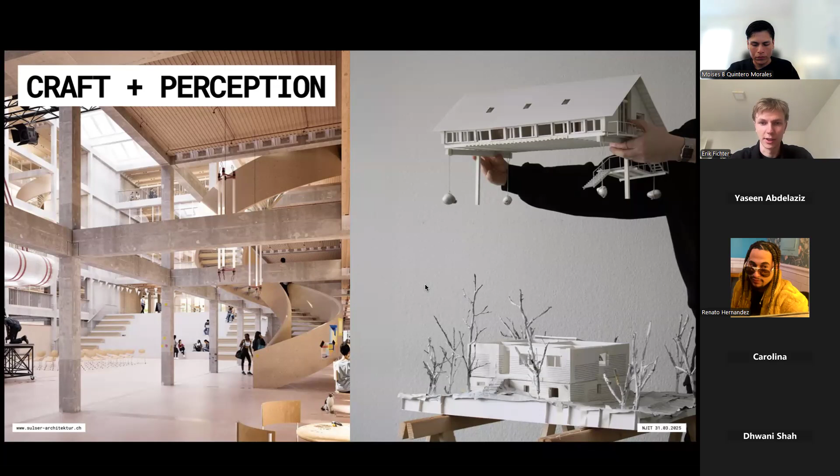And mainly to give you a bit of a background, our practice is in Switzerland. It's a relatively small country in the center of Europe, though not part of the EU. And I'm showing this to also give you a sense of geography and climate. I think our climate in Switzerland is relatively similar to the one in New Jersey. I think your winters and summers are slightly more extreme, but not too different.

Also, I was just researching just before: the population of New Jersey state and Switzerland is basically the same, more or less 9 million inhabitants each. So we're not all too different.

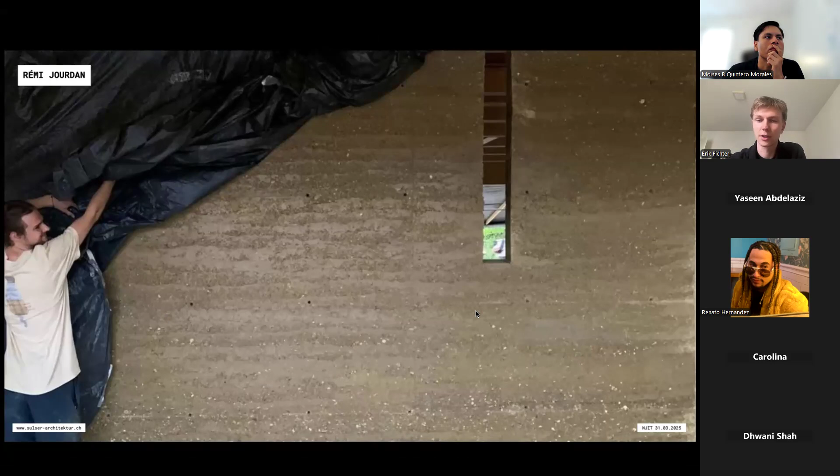I'm running this practice together with my partner, Rémi Jourdan. We met each other around 10 years ago during our studies at ETH in Zurich. And he's become an expert in earth construction. And he also gained a lot of experience on construction sites. So this photo shows an example of a rammed earth wall that we built together. And here another example of a rammed earth oven that we built. He's also very much interested in sharing knowledge and having construction sites where people can join and learn.

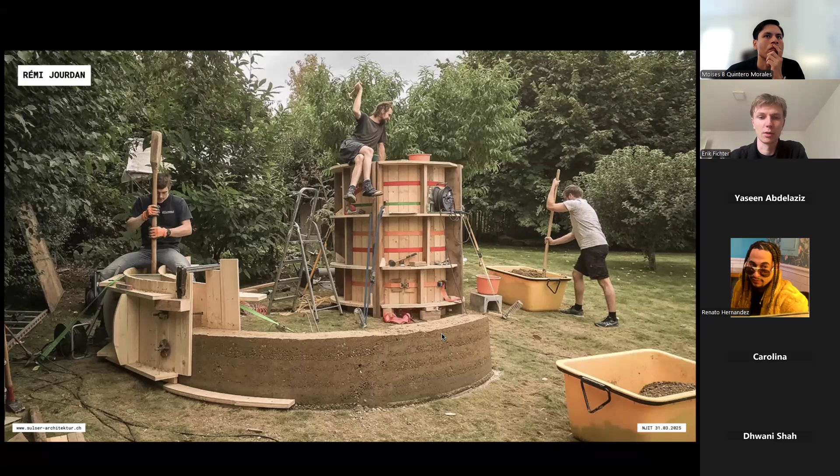And as Moises said already, after the ETH, I went to the GSD for my master's, and there I developed my interest in adapting existing structures and modifying buildings and also playing with the perception. And this model was part of my thesis, where I've introduced a new bracing system to the existing tower in Berlin, allowing to remove the existing cores to free up the plan and introduce new functions. So it's been a pragmatic approach, but at the same time, it drastically altered the urbanistic perception of how the building is read in relation to the ground.

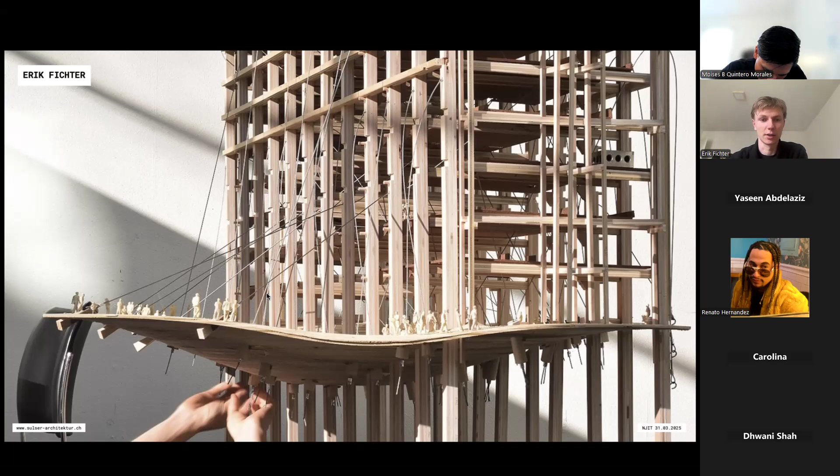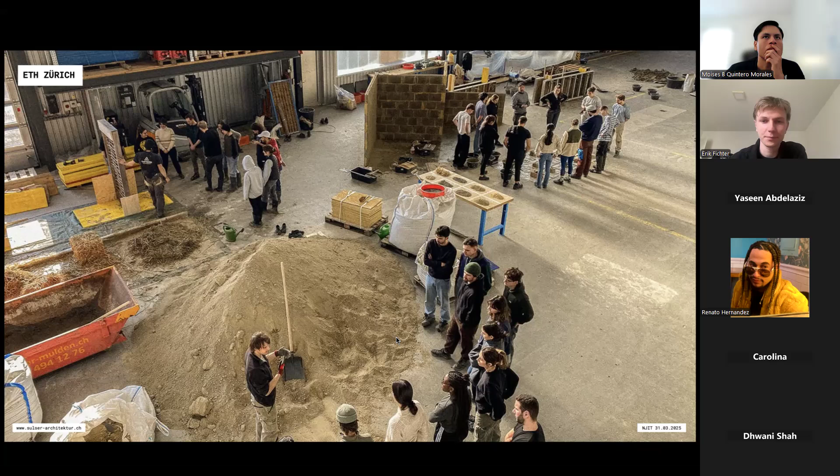And then also just to mention that we are both working part-time at ETH, Rémi mainly in research, and I'm mainly teaching, because we think it's always very fruitful to have an exchange with students and test new ideas. And this was part of an earth workshop that Rémi organized.

So one topic that we both think is very important is to move the building industry in a so-called right tech direction. And what we mean by that is we are criticizing the amount of technical systems and equipment that are built in buildings, especially over the past decades. It has really steadily increased a lot, and we don't think that it has improved the inside climate much, and also these systems are quickly outdated, so it's not very economical.

And we think there's a lot of knowledge if we go back in time, even into pre-industrial times, where the construction itself had a lot of knowledge that was then eventually taken over by technical equipment. And so there are two terms, one of which is thermal mass, and the other one, vapor open construction, that I want to talk about more in a second. But at the same time, we don't want to be only low tech and no high tech, but instead of putting the tech inside the buildings, we want to leverage it by using it in an efficient planning process and doing, for instance, thermal and vapor simulations.

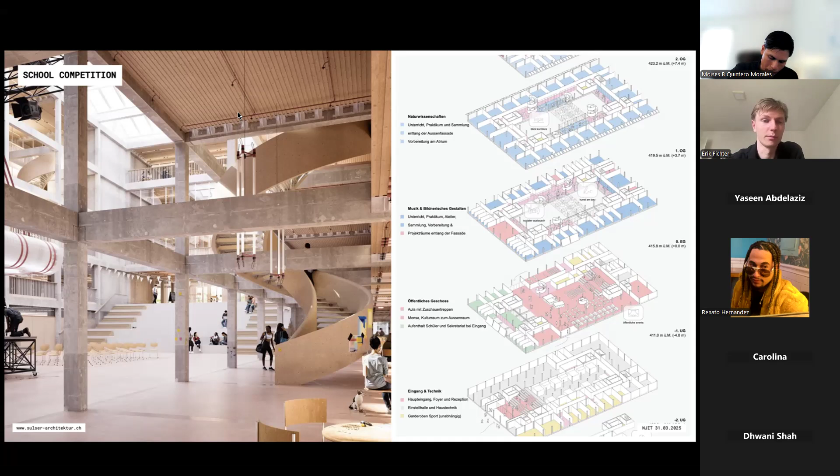Then on this slide, I just want to make the point that we are increasingly trying to use numbers and calculation to prove certain points. And in the submission, we made a calculation for one module to see how much embodied carbon is within the module, and then compare it against the conventional construction so that we make the point this module has less than a third of the embodied carbon than what a conventional construction would have.

And so I think this is also something we want to build out more, to use a data-driven approach to make a point and to convince potential clients. Okay, and so this would have already been the last slide for the presentation I made 2 weeks ago, which was at that point very much work in progress.

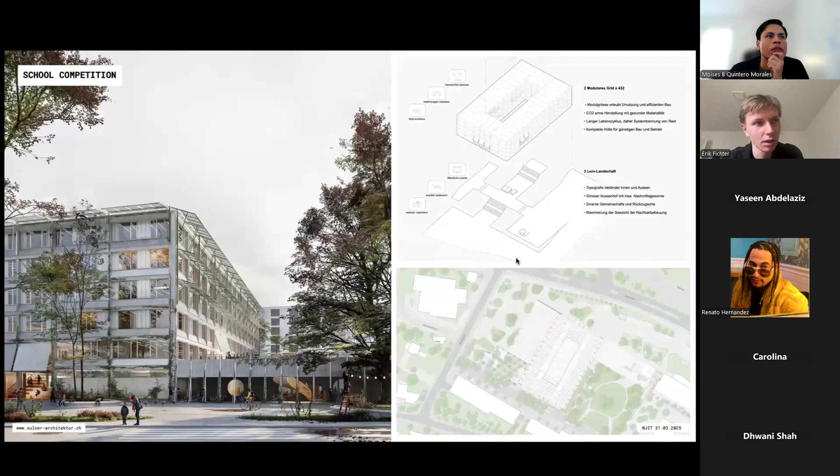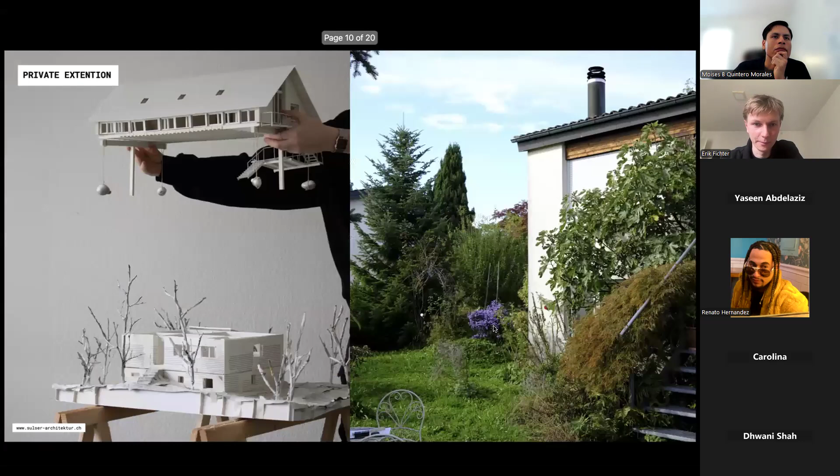Very cool. Thank you very much. Hi, my name is Yaseen Abdelaziz. I thought the presentation was great. I think you did a great job, especially with the model as well, whether it was the physical or what you have going on over here. If you could go back to the smaller scale model, I'd love to see it again. In this one, huh? Yeah. So I think it was the previous slide that you just, yeah, perfect.

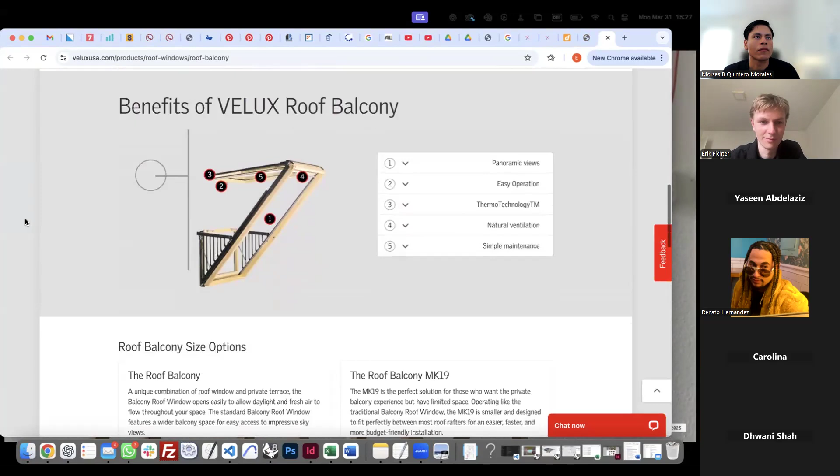So at the architectural firm that I currently work at, we had an issue where we had a similar roof and the client wanted to add some balcony space. So we used these windows. I added it to the chat. I think it would be a great idea to look at that. I know that you specifically amplified on these windows, but these kind of windows open up into balconies and it creates really interesting spaces. And I think for a big roof like that, highlighting moments where you'd be able to walk out and engage with Switzerland, because I know that you guys have great views over there instead of New Jersey.

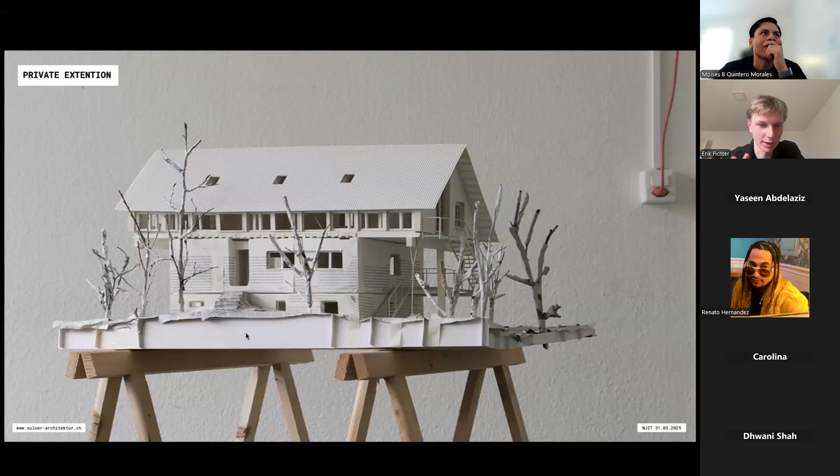It would be pretty interesting to see if you could kind of amplify that. Yeah, no, it's a great comment. Actually, so this is the north facade facing the street, so the, let's say, less interesting side. And then on this side, that's where we try to introduce this rather big opening where you can fully open the glazing. But it's a good point.

We have this regulation here in Switzerland that you can only do such a thing, I'm also not sure how to call it, but having this push out of the window being not larger than 1/3 of the width of the entire roof. So measuring from here to the very end, and then you can take 1/3 and do such a build-up. Okay, I see. Thank you.

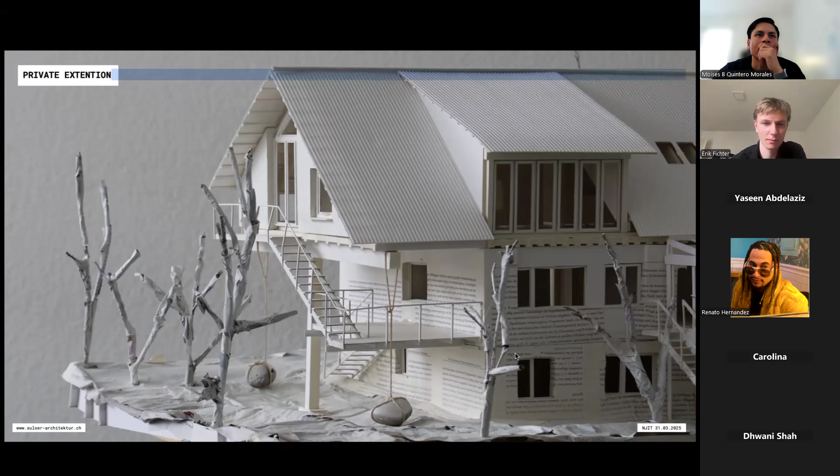What about Mariam, Dhwani? I was gonna ask, in one of the slides where you were presenting the fabricated model of that window side, you had this frame with a filled up frame, that one. Can you just touch up a little bit more on that? I don't think I really understood that. Like, what is that doing? Like insulation? You mean the lower part? Here, this one. The picture before. Oh, that. In the straw field. Yeah. Oh, sorry. These ones here?

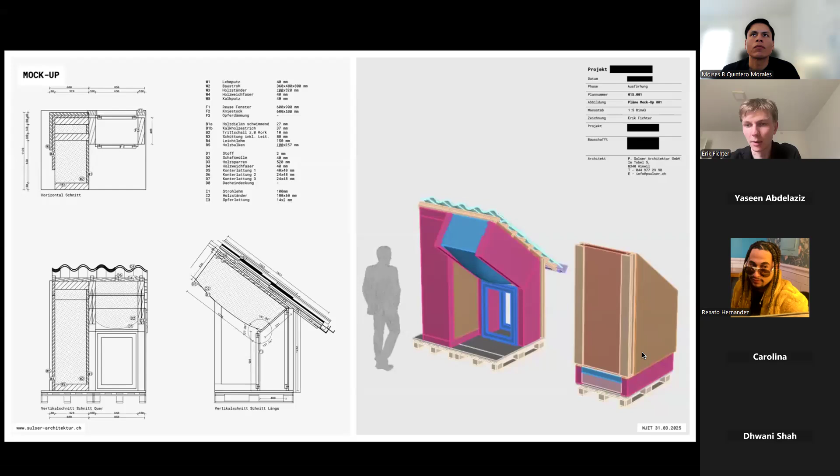Yeah, so exactly. So basically, this is the one where we tested the outside facade connections, and this other model was just to test the floor buildup as well as interior walls. And if I go back here again, this was really just a test, but we had this thing in mind where oftentimes you use in a construction a lot of layers, and we like to think of ways how to simplify everything. So in this example here, we had kind of a formwork similar to what you would use with concrete, and then made this mix of earth and hay, and we kind of all rammed it inside. It has enough mass that it could act as a normal interior wall in terms of acoustical properties and so on.

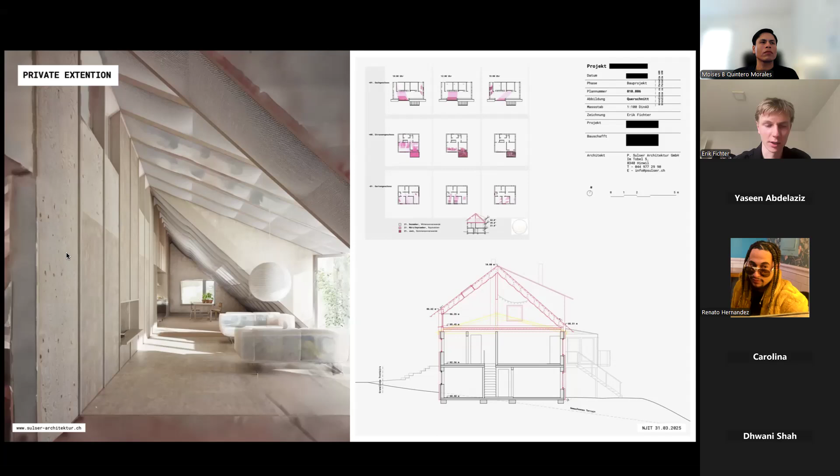Personally, I think right now how it looks is a bit too rough for a residential use, but it theoretically could work. And then this panel that you can see behind here. Maybe also go to the rendering for orientation. So this is kind of the main wall, and then behind the wall we have 2 bedrooms, 1 bathroom, and they are also subdivided by interior walls. And this inclined wall would be one of those. And there we just used wooden studs and again sheep wool, and on one side we used earth plastering, and on the other side we tested again with the textile, so these were just tests for interior walls.

So then compositionally, how much of your work depends on the research that you have done and pre-existing ways to build, for example, a straw wall, a certain type of ceiling or rammed earth composition, versus you trying to optimize for a very specific condition that happens on a site? So is there an interplay between the two, or do you just sort of see what works and then see what can be applied?

Yeah, it's a tough question. I feel like it's not super site specific. It's more, let's say, climate specific, right? All these systems could be applied in different areas in Switzerland, or actually anywhere. It's more maybe the immediate context of the building program, that we say, okay, it's residential, or we need certain acoustical properties, or it's higher up in the mountain, so we need more insulation. So these things might be drivers for how to adapt certain constructions.

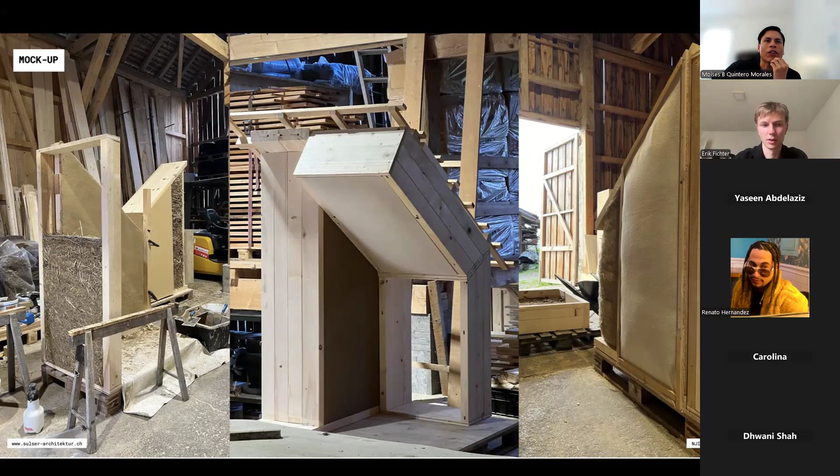Got it. So then I have two questions, one for you and then one for the class. The one for you would be, what does the maintenance look like for these walls, roofs, etc.? Is it low? Is it high? And do the residents enjoy partaking in any part of the upkeep? And then for the class, could any of you see some of these strategies being used in New Jersey, New York? What do you all think?

Well, if I would start, it's hard to say. We think what we are building is quite durable. Maybe the image of it doesn't give the feel, but we're trying to build so that it works for a long time. Also, the aspect I was talking about in the school competition, of detailing a building in such a way that it could be easily adapted, is quite important, because there are always elements in the building that will last longer and others you might want to replace or the program forces to be replaced. Therefore smart planning allows for easy changeability. I think this is super important.

And besides, there are many examples of wood buildings, earth buildings, and so on here in Europe that are standing for hundreds of years, which is much longer than modern buildings. So in terms of maintenance, I'm quite confident that these could be durable buildings.

Yeah, I think it could work. Like Erik mentioned, the climate in Switzerland, from what I'm understanding, is really close to Jersey. And I could definitely see myself driving down New Jersey and seeing houses like this. So there's definitely a lot of potential for it. Others?